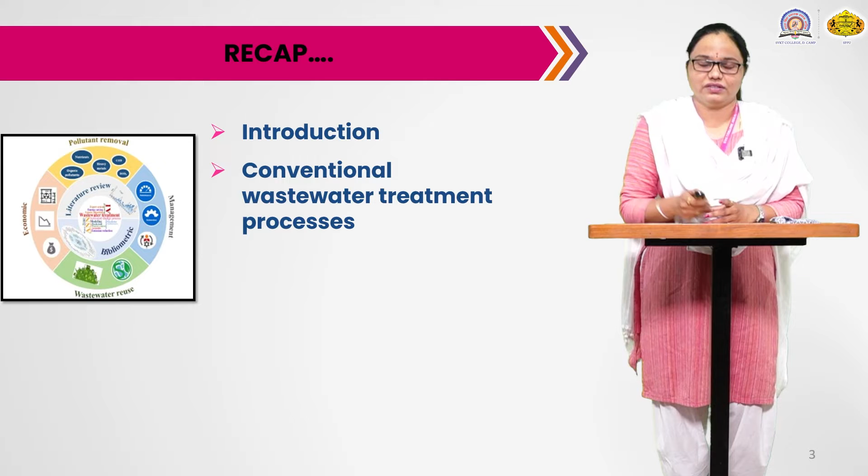In the last lecture, we started with the introductory part of wastewater technology: what is wastewater, how it is used, and what are the types of wastewater treatment. Then we saw the conventional wastewater treatment processes, divided into different stages: preliminary, primary, secondary, tertiary, and then advanced stage. In some cases, advanced treatment is also given to the wastewater.

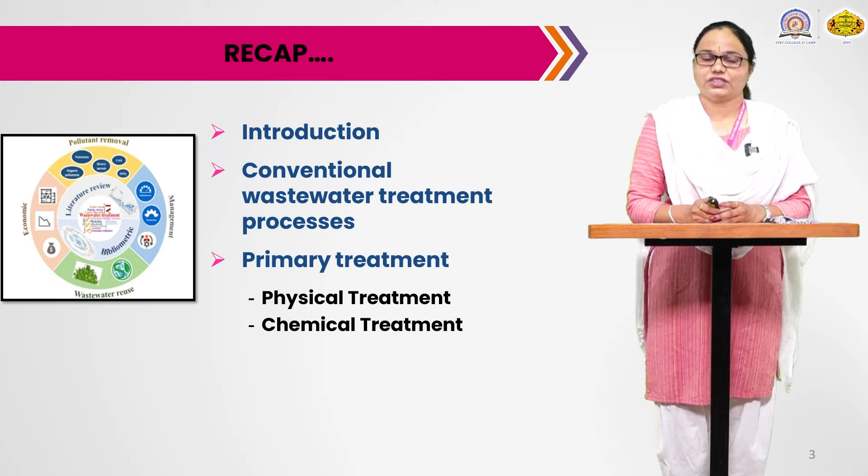In the last lecture, we started with the first step of wastewater treatment, that was primary treatment, in which we saw two methods: physical treatment and chemical treatment. In physical treatment, we generally use screening methods, grit tanks, etc. And for chemical treatment, we use chemicals such as flocculants, coagulants, etc.

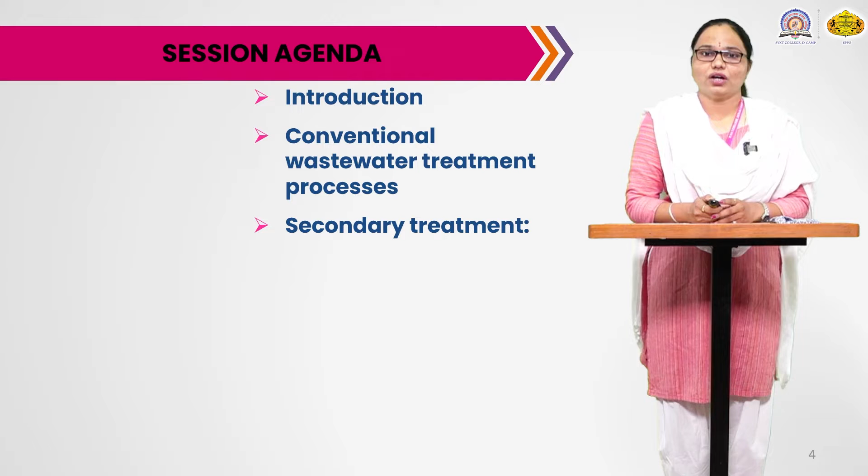Now, today's session agenda is to again start with our introductory part of conventional wastewater treatment process. Then we are going to focus specifically on secondary treatment, in which we are going to study two methods of this secondary treatment, that is activated sludge system and trickling filters.

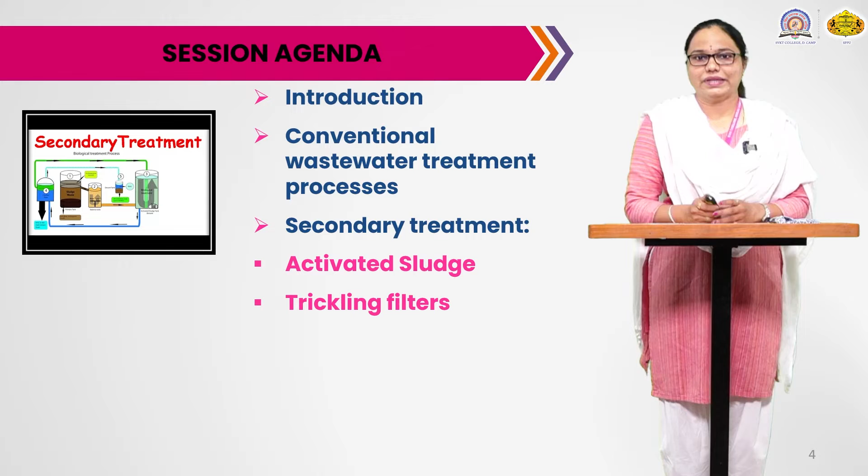So today we are going to see these two methods in detail. Our objectives for today's learning are to give introduction to wastewater technology, then see the secondary sewage treatment methods.

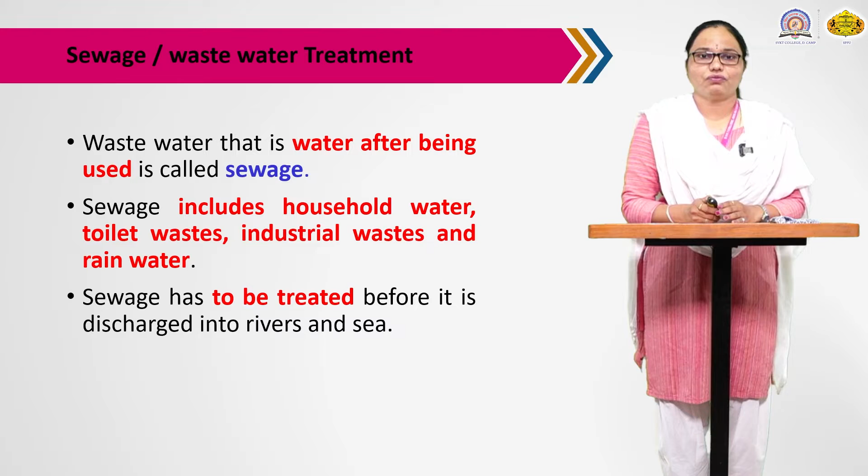This sewage should be treated before it is discharged to the rivers and seas. As we know, there are a number of chemicals and pathogens present in such type of sewage, so prior to discharge into rivers or sea, it should be treated. For such treatment, wastewater plants are developed.

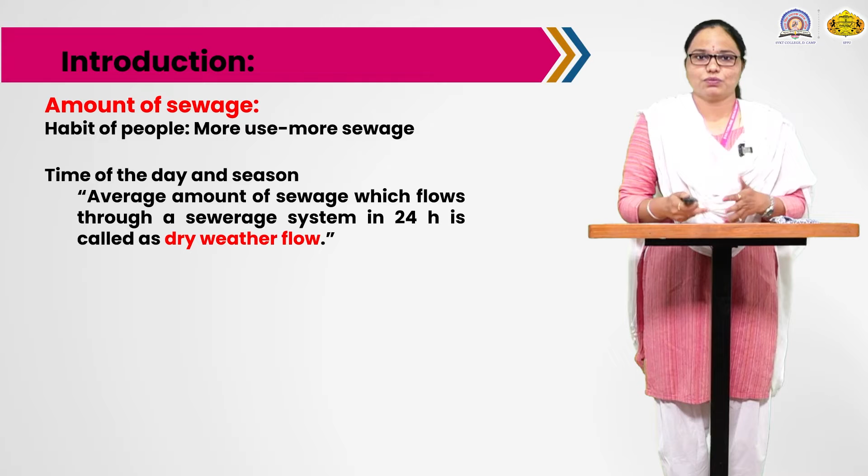Now, amount of sewage produced: it is a habit of people to use more and more water, and as they use more water, a large amount of sewage is generated. Considering time of day and season, the average amount of sewage which flows through a sewerage system in 24 hours is called dry weather flow.

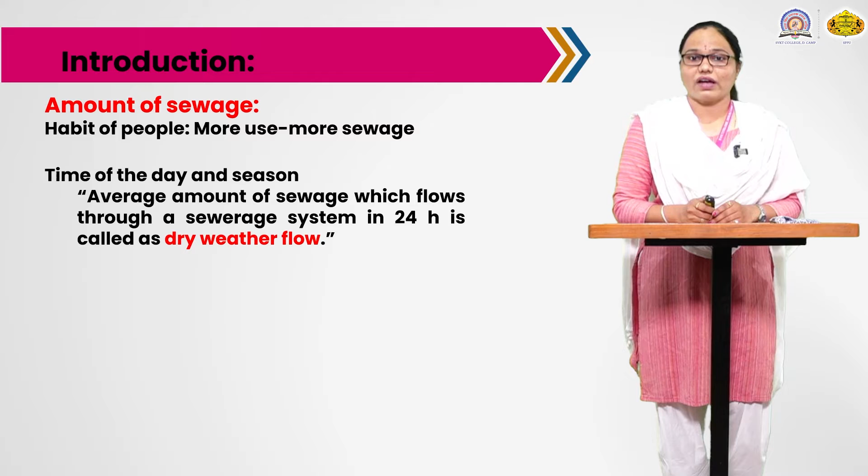Now this sewage may create a number of health issues. First, it creates a nuisance or unsightliness and unpleasant odors. It has a large number of organic matter, which may lead to unpleasant odors. Then this sewage is a source for breeding of flies and mosquitoes, which may lay their eggs in such type of water.

Pollution of soil and water supplies may occur, and contamination of food also occurs due to this sewage. Due to all this, there is an increase in the incidence of disease, especially enteric and helminthic disease. It may lead to diseases such as malaria, dengue, and some food contamination or infections if such type of sewage is not treated.

Now, why is it important to treat sewage? First, wastewater treatment is fundamental to protect the health of many different ecosystems.

Then, properly treated wastewater is a source of water for many purposes; we can reuse this water. Good wastewater treatment allows maximum amount of water to be reused instead of going to waste. These are the important points for wastewater treatment.

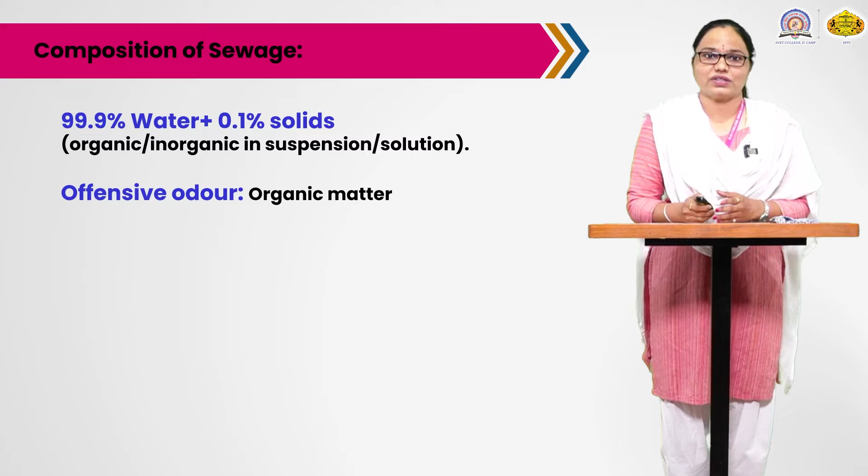The offensive odor of sewage is generally due to the presence of organic matter, which may get decomposed and produce different kinds of byproducts leading to offensive odor. This sewage also has a large number of pathogenic organisms; as we know, 1 gram of feces may contain 1000 millions of E.

...coli, 10 to 100 millions of fecal streptococci, and 1 to 10 millions of spores of Clostridium perfringens. Humans generally secrete 100 grams of feces per day, so you can calculate how much pathogenic organisms are present in the sewage. So such sewage must be treated, or it may be disinfected too, as these organisms can be killed.

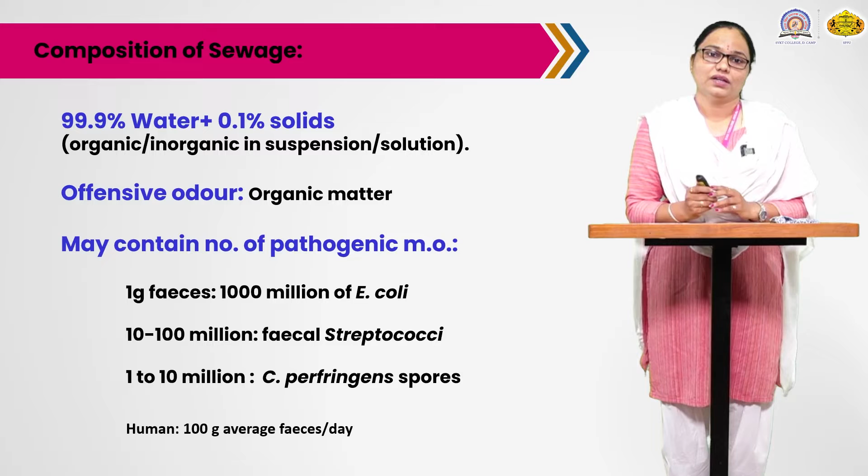Decomposition of organic matter in the sewage takes place generally by two ways. The first and most efficient method is aerobic treatment. It requires continuous supply of oxygen, so all the organisms can grow in that sewage. Here bacteria, fungi and protozoa convert organic matter into CO2, H2O, ammonia, nitrates and sulfates.

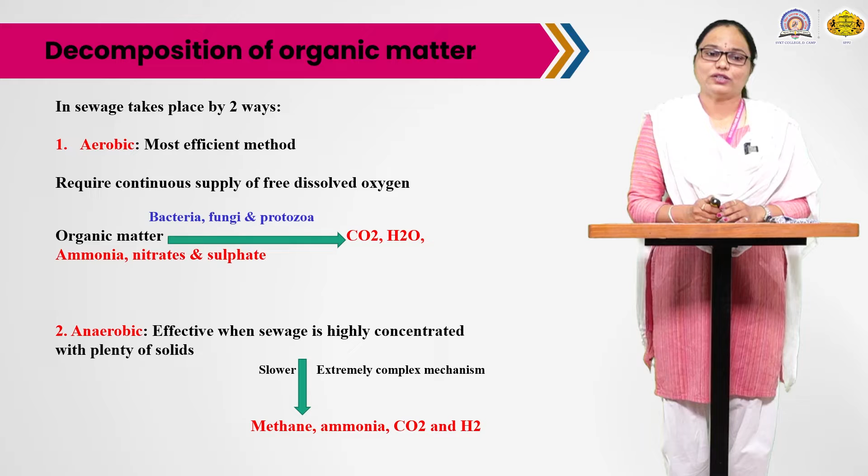The second method is anaerobic method. It is effective when sewage is highly concentrated with plenty of solids. Compared to the aerobic decomposition method, this method is slower and has an extremely complex mechanism, and it leads to conversion of solids into methane, ammonia, CO2 and H2. So in this way the organic matter is decomposed by two methods, aerobic and anaerobic.

Now, benefits of wastewater treatment. What happens after wastewater treatment? What are the benefits? There are different benefits: reduction of waste, energy production, reuse of water, pollution control, fertilizer production and many more. So these are the benefits of wastewater treatment.

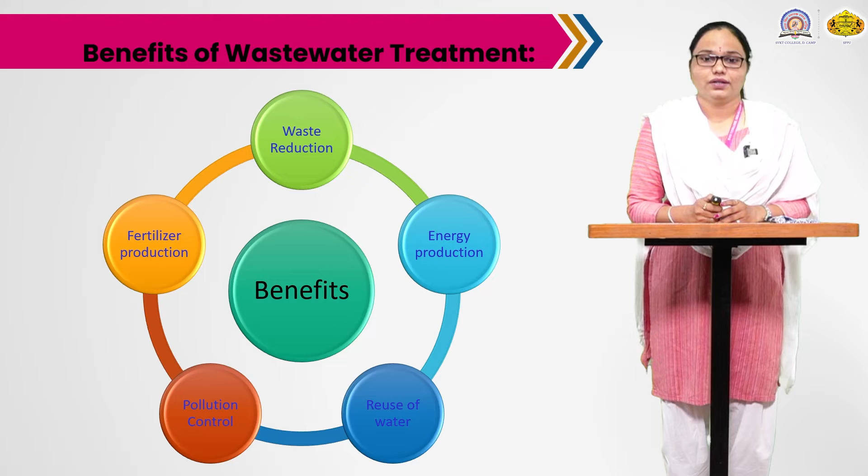Now the conventional wastewater treatment process is divided into different stages. The incoming sewage is treated in different stages. The first is preliminary treatment, where screening is done and grit chambers are used. Then is primary treatment, where both physical and chemical methods are used, but generally this primary treatment is a physical method of treatment.

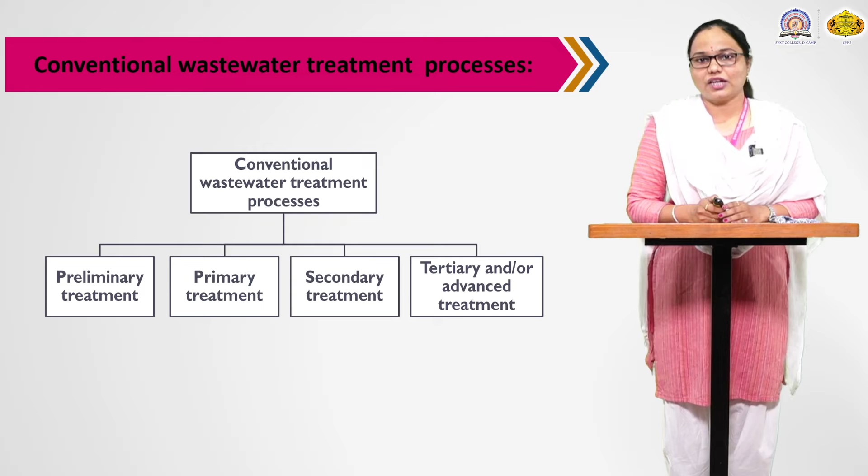Then the water comes to the secondary treatment process, which is generally biological, where there is a role of organisms which decompose the organic matter. After that, it goes to the tertiary or advanced treatment, which is mostly chemical, where different chemicals are used for the disinfection process. Sometimes UV rays are also used for disinfection. So this conventional wastewater treatment is divided into different stages.

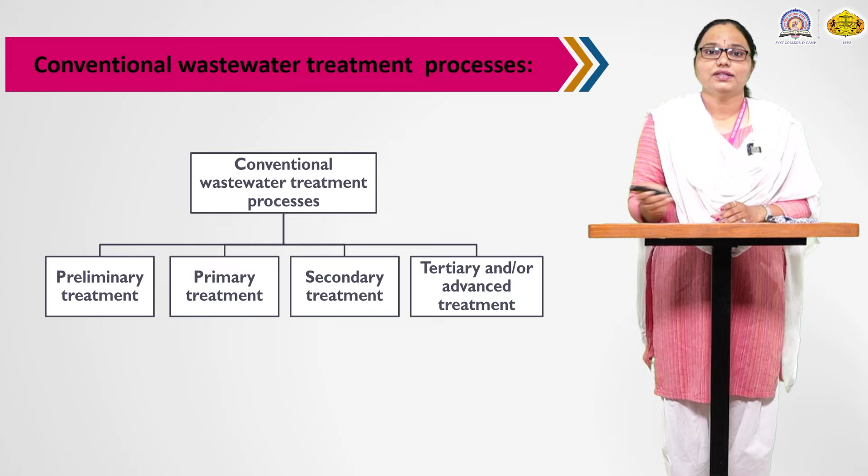Levels or steps of wastewater treatment: as I told you, the first stage is primary treatment. It is generally a physical process. The floating material and solid material present is removed in this stage. Secondary is secondary treatment, which is a biological process, where there is a role of organisms. The organic matter is decomposed by this bacteria into CO2 and water. So in this step, most of the BOD is reduced.

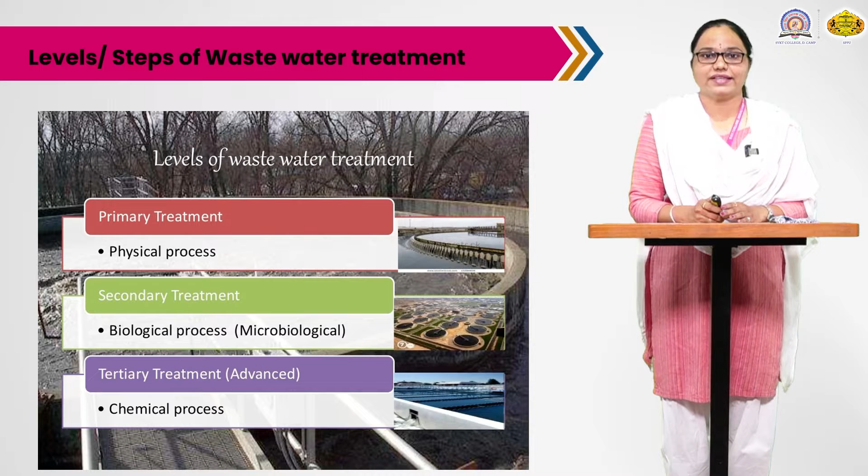Then is the tertiary treatment, which is an advanced method or stage, where generally chemicals are used to kill the pathogens present in the wastewater. So in this way, the wastewater treatment plant has these stages: primary treatment, secondary treatment and tertiary treatment.

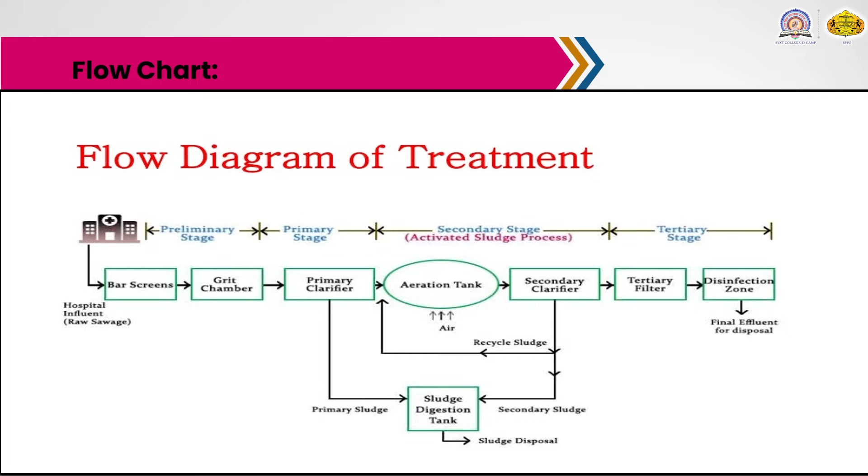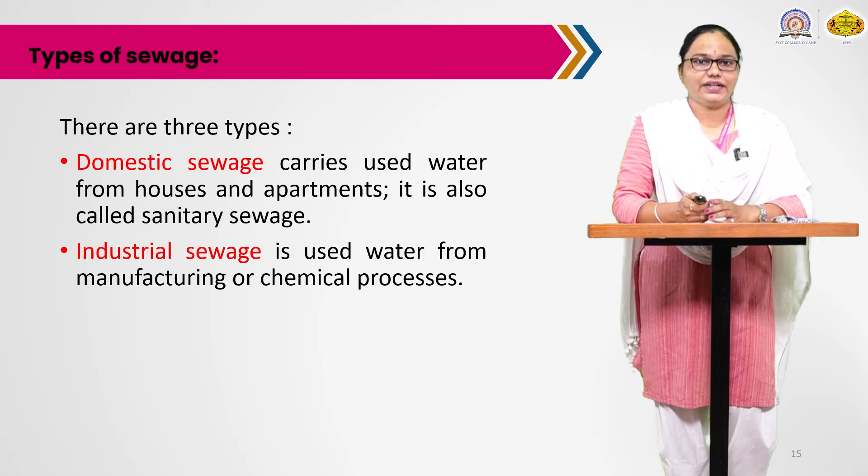Today we are going to focus on the secondary stage, types of sewage. There are different types of sewage, mainly three types. Domestic sewage carries used water from houses and apartments; it is also called sanitary sewage. Second is industrial sewage, which is used water from manufacturing or chemical processes, generally industrial effluent. Third is storm sewage or storm water, which is runoff from precipitation collected in a system of pipes or open channels. So sewage may be domestic, industrial or storm sewage.

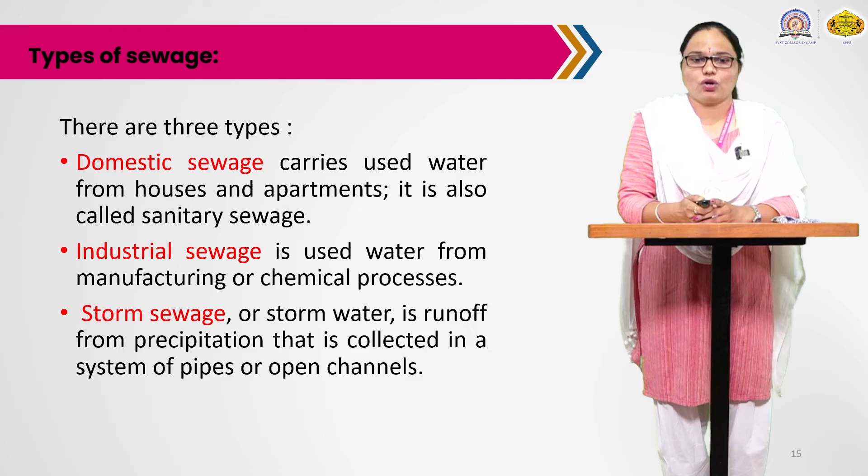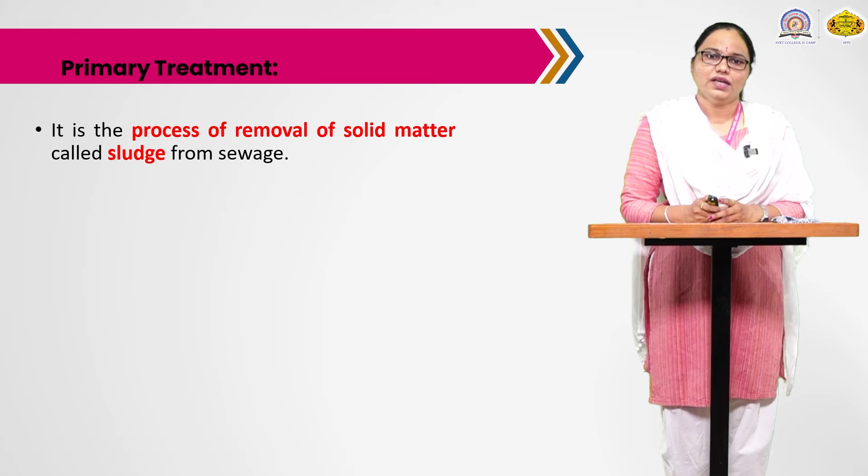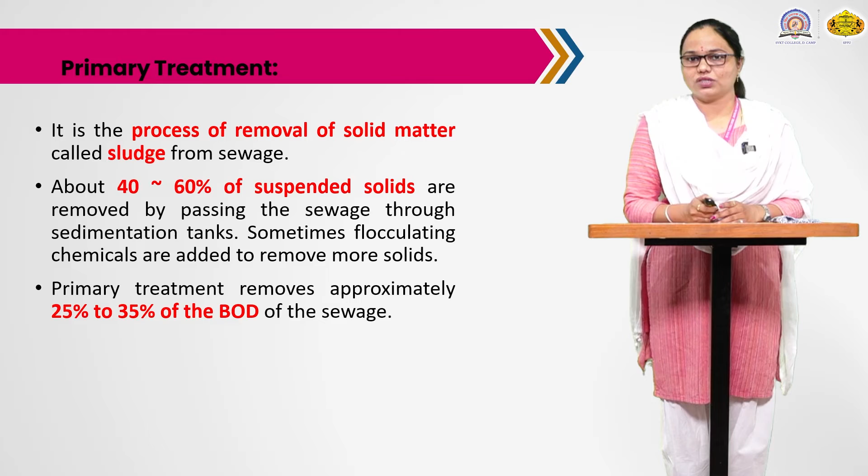Now primary treatment, which we have seen in the last lecture, is a process of removal of solid matter called sludge from the sewage. About 40 to 60% of the suspended solids are removed by passing this sewage through sedimentation tanks. Sometimes to increase the speed, we use some chemicals or flocculating chemicals to remove the solid material which is lighter in weight. This method generally removes approximately 25% to 35% of the BOD of the sewage.

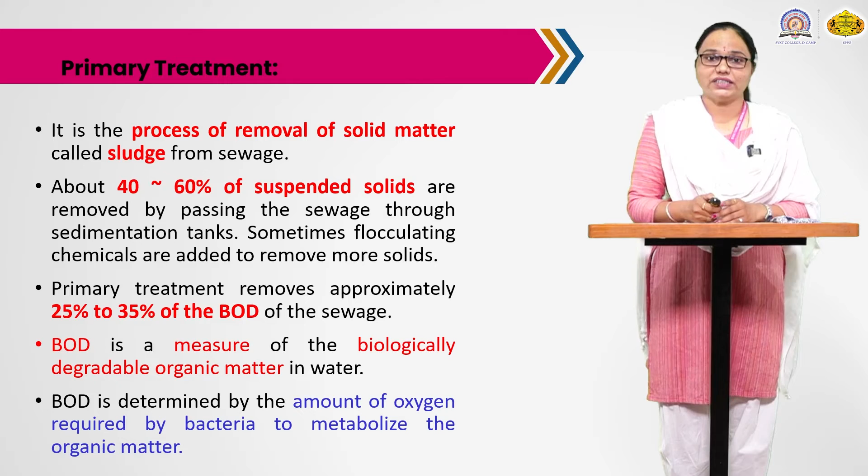Now BOD is a measure of biologically degradable organic matter in water, which we have seen in the last lectures. BOD is determined by the amount of oxygen consumed by bacteria to metabolize the organic matter, and that is called biological oxygen demand.

Secondary treatment, as I told you, is the biological degradation of organic matter in sewage after the primary treatment. In this process sewage is aerated vigorously to encourage the growth of aerobic bacteria and organisms that will oxidize the dissolved organic matter to CO2 and water. This extra step, aeration, is given in an aeration tank to provide lots of oxygen for the growth of aerobic bacteria. Two commonly used methods for secondary treatment are activated sludge and trickling filters.

Now we are going to see what the activated sludge system is. It is a type of wastewater treatment process for treating sewage or industrial wastewater using aeration and a biological floc composed of bacteria and protozoa. So it has basically two steps: first is aeration and the second is activated sludge.

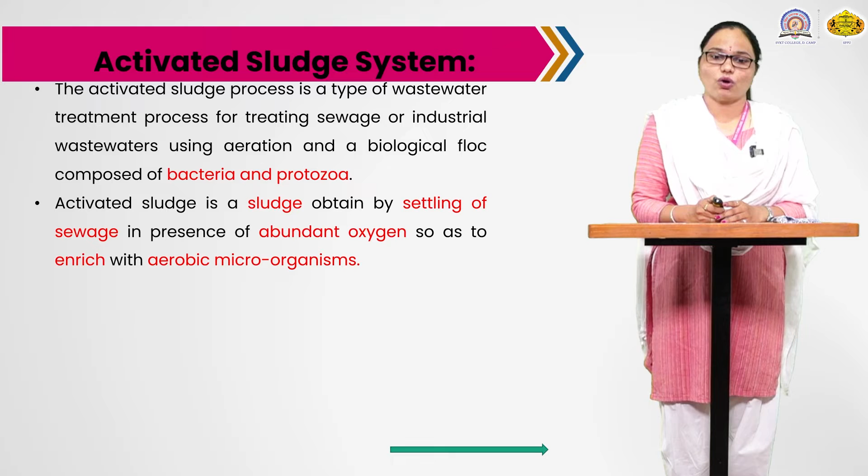So what is activated sludge? It is a sludge obtained by settling of sewage in the presence of abundant oxygen so as to enrich it with aerobic microorganisms. This activated sludge in sewage, in presence of oxygen, results in oxidation of organic matter present in that sewage, and coagulation and flocculation of suspended and colloidal matter.

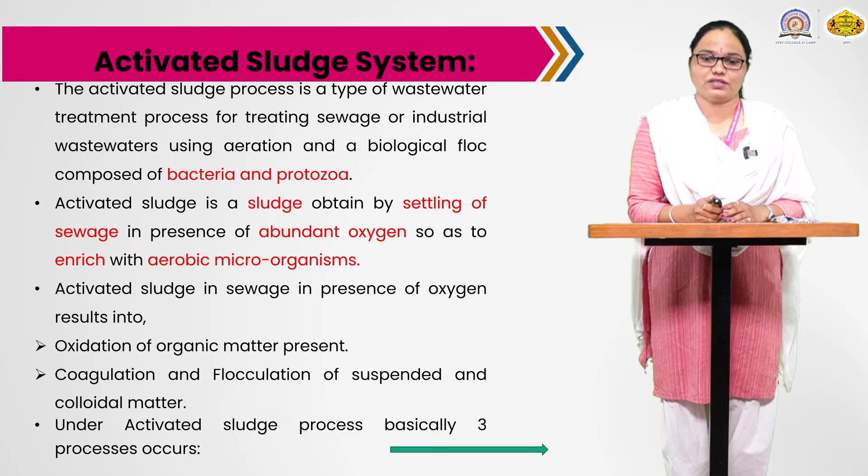Under this activated sludge process, basically 3 steps or processes occur. First is oxidation, where the organism oxidizes organic matter present in the sewage into carbon dioxide, water and energy. The organic matter, in presence of oxygen and bacteria, is converted into CO2, water and ammonia plus energy, and other end products are generated.

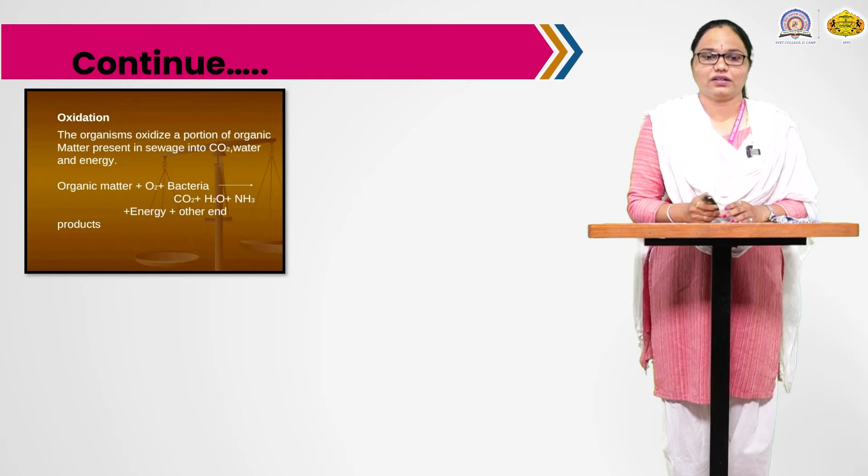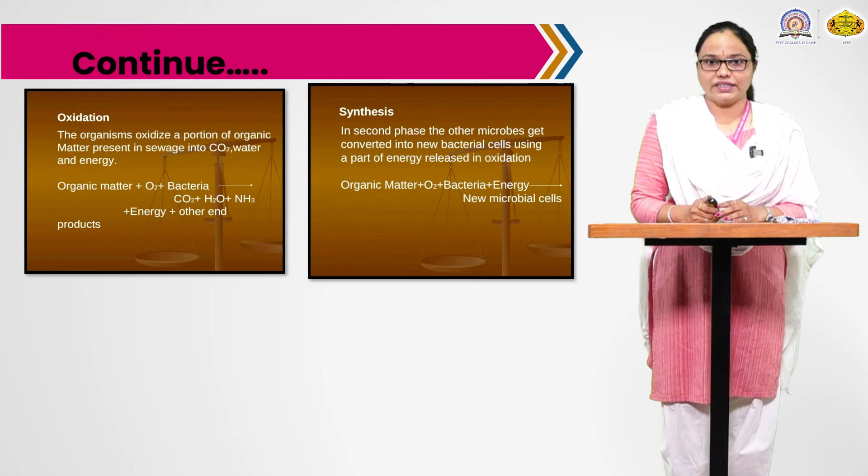The second step is synthesis. In this phase, microbes are converted into new bacterial cells using part of the energy released in oxidation. Here organic matter, in presence of oxygen, bacteria and energy, is converted into new microbial cells. The third step is endogenous respiration.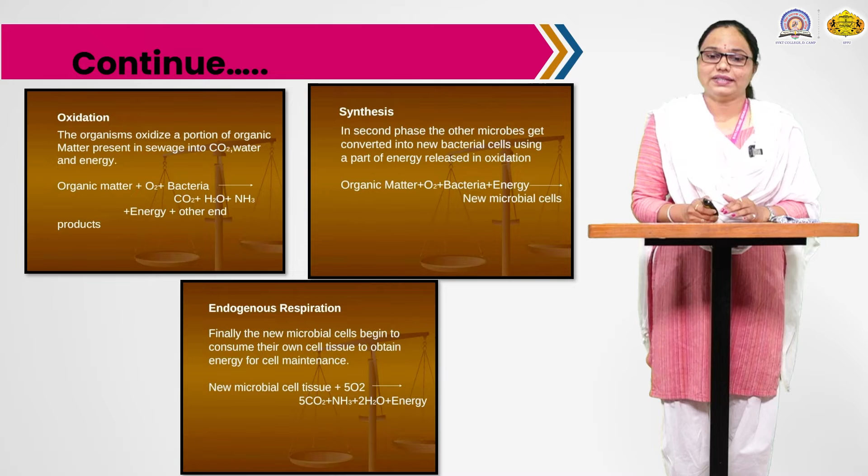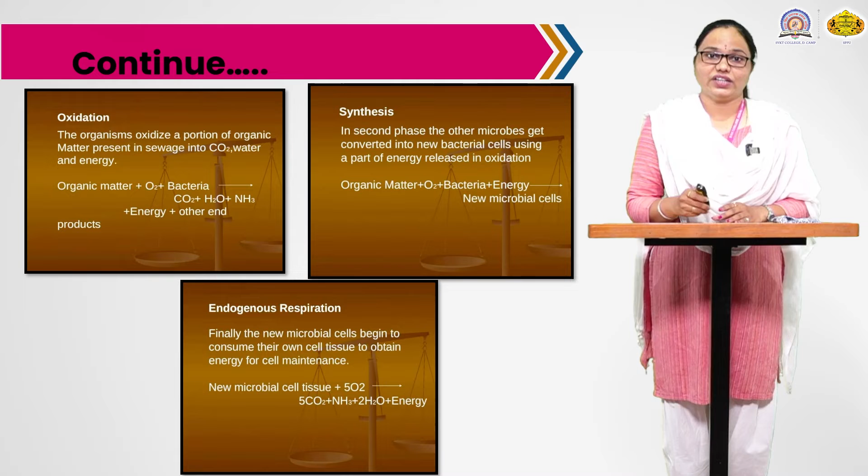Finally, the new microbial cells begin to consume their own cell tissues to obtain energy for cell maintenance. Here new organisms or microbial cell tissues, in presence of oxygen, convert the organic matter into carbon dioxide, ammonia, water and energy at higher speed. So basically these 3 steps occur in the activated sludge process.

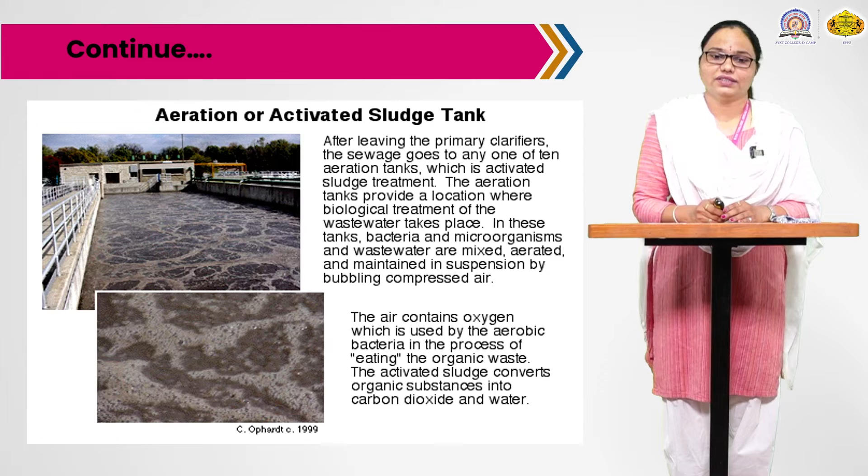Now this is some image of the aeration or activated sludge tank. You can see the air contains oxygen which is used by aerobic bacteria in the process of eating or degradation of organic waste. The activated sludge converts organic substances into carbon dioxide and water. These are some actual images of the activated sludge tank at the site.

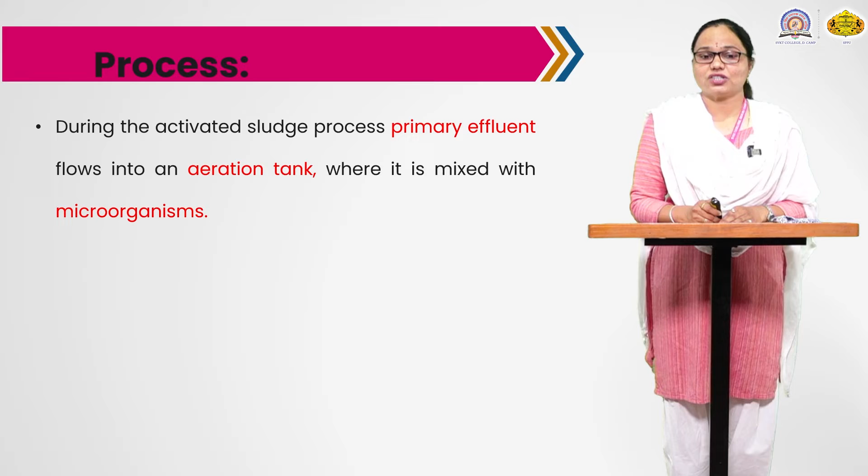Now let's see how the process occurs. During the activated sludge process, the primary effluent first flows towards the aeration tank, where it is mixed with microorganisms. The aeration tank injects a steady supply of oxygen from the bottom into the wastewater, ensuring adequate oxygen supply so the organisms can use that oxygen to break down the organic matter present in the effluent.

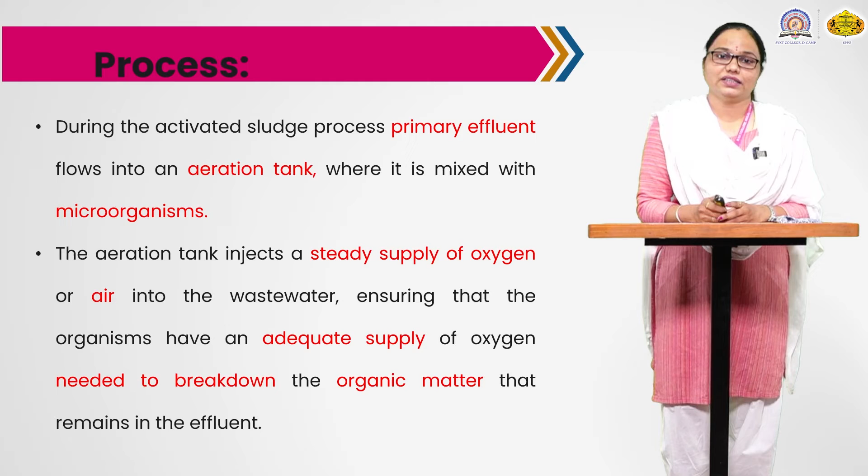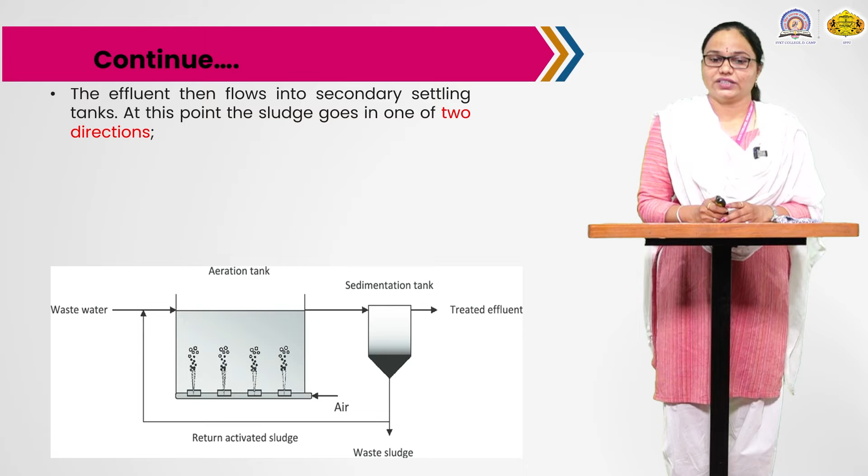Now the effluent flows to the secondary settling tank. At this point the sludge goes in one of two directions. In the diagram you can see it first goes back to the aeration tank. This is because the return of the sludge contains a large amount of active organisms that will rapidly break down the organic matter. You can see how the aeration process is applied here.

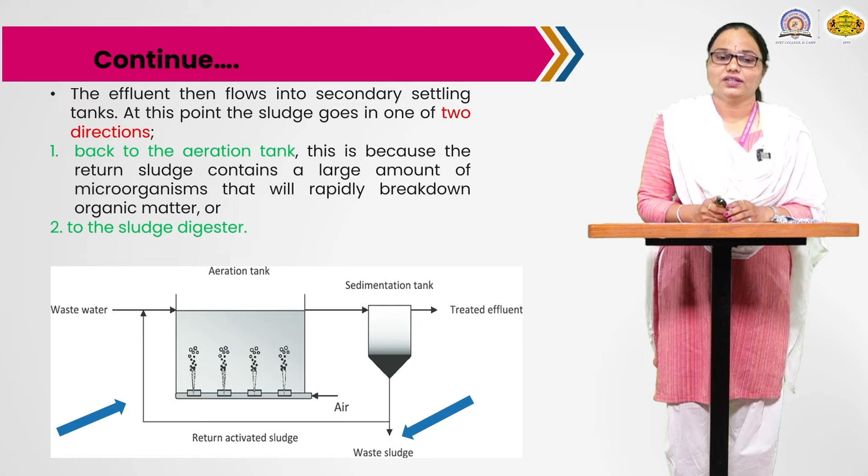Part of the activated sludge is returned to the aeration tank, and the second part goes towards the sludge digester. The extra sludge is collected into the waste sludge container.

The treated water will enter the tertiary treatment stage. Here it will go through the final treatment stage before it is released into a natural water system.

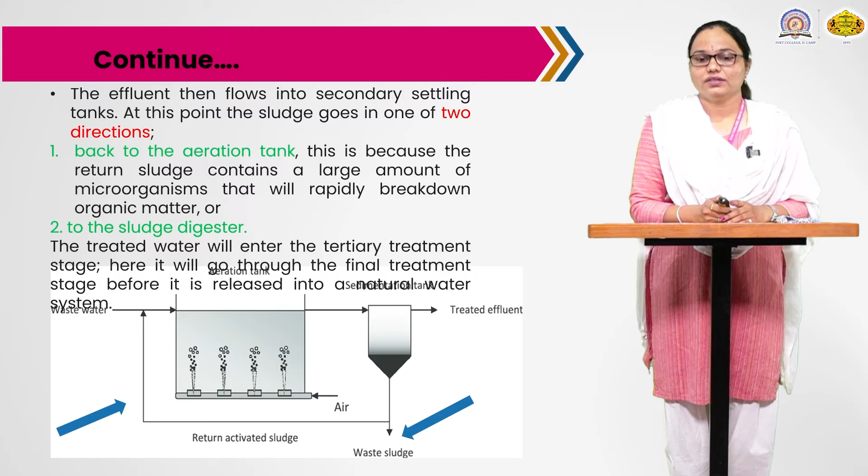Now this is the flow chart of the activated sludge process. From the preliminary treatment, this sewage goes towards the primary clarifier and then it enters the aeration tank, where aeration is given.

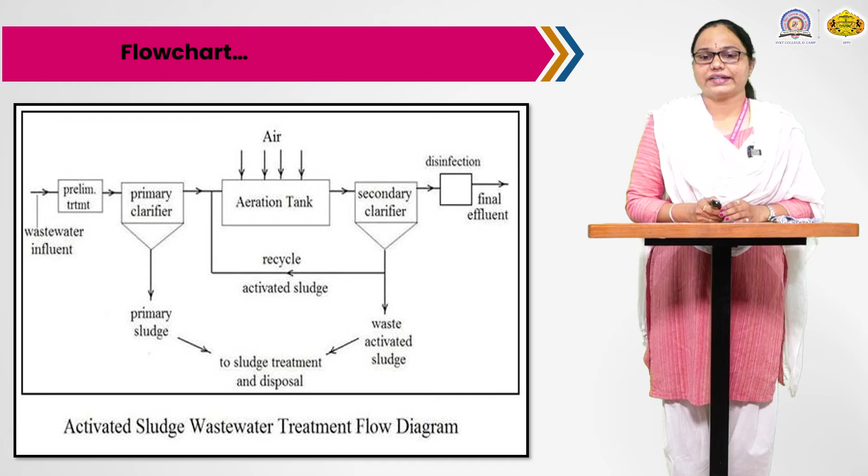The sludge from the secondary clarifier is recycled and called activated sludge, which contains active organisms. The extra sludge is collected into the sludge treatment and sludge digester, and afterwards it is treated and disposed. The sewage from the secondary clarifier then enters the tertiary treatment where disinfection occurs.

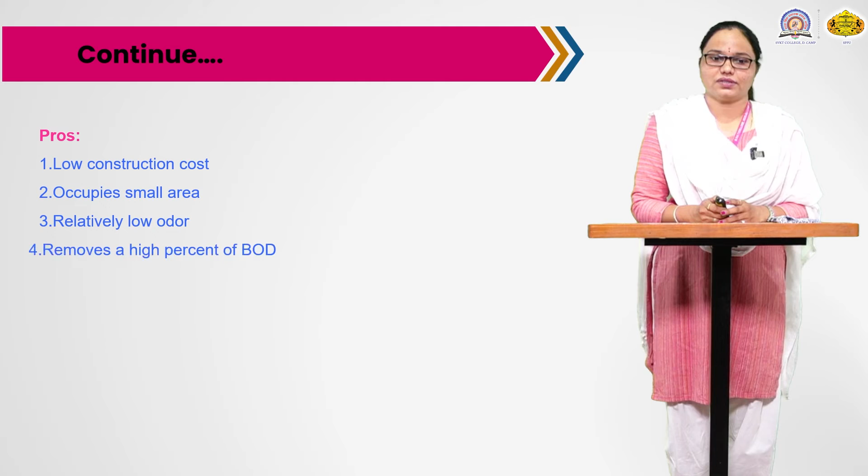Now there are some pros and cons of this method. The first is low construction cost. It occupies a small area, meaning relatively low odor is produced, and it removes a high percent of BOD.

Cons are high operating cost because extra aeration pumps are needed, and high energy expenses for oxygen demand.

Now we will move towards trickling filters, the second method. What are trickling filters, also called biofilters? It consists of a basin or tower filled with support media such as stones, plastic shapes, or wooden slats.

In this tower with support media, wastewater is applied intermittently or sometimes continuously over the media. The organisms present in the effluent get attached to the media, supported by stones, plastic shapes, or wooden slats. They attach to such media and form a biological layer or fixed film, also called a biofilm, on the surface of that media.

The effluent, which has a large amount of organic matter, diffuses into the film where it is metabolized by the organisms present in that biofilm. Oxygen is normally supplied to the film by natural flow of air, either up or down through the media, since aerobic organisms are present there, depending on the relative temperature of the wastewater and the ambient air.

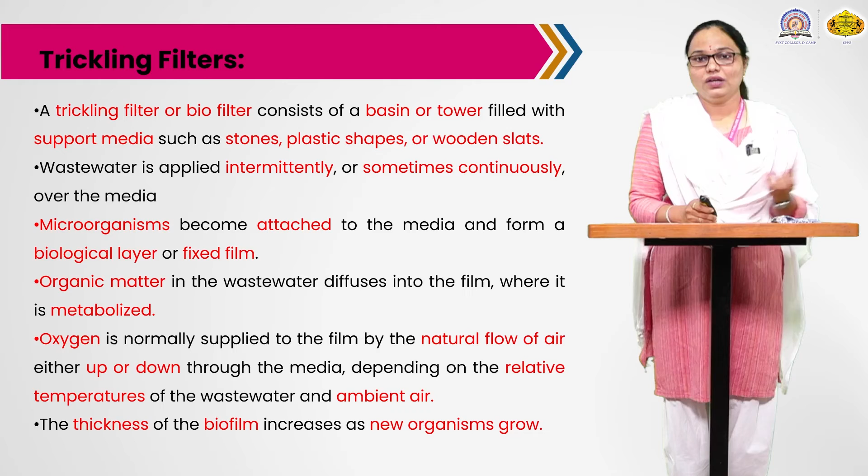The thickness of the biofilm increases as new organisms grow. As the incoming effluent arrives, a large amount of organisms come into the trickling filter, so the biofilm becomes thickened due to growth of new organisms.

Periodically a portion of the biofilm sloughs off the media. This material is separated from the liquid in a secondary clarifier and discharged to a sludge processing unit. The clarified liquid from the secondary clarifier is called secondary effluent, and a portion is often recycled to the biofilter to improve the hydraulic distribution of wastewater over the filters.

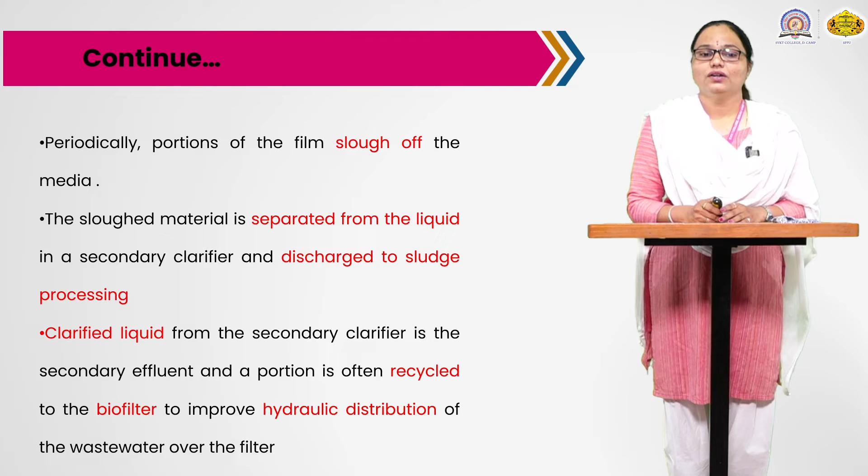There is a formation of a slime layer or biofilm on the surface of this media. The incoming effluent has a number of organisms which get attached to the surface of this media and form the slime layer. The organic matter present in the effluent is consumed by that bacteria, and the extra thickened layer sloughs off from that support. Oxygen is supplied through natural air.

Now the organic material present in the wastewater, in the presence of air, is degraded or decomposed by the organisms present in the slime layer, and that organic matter is converted into CO2 and other oxidized products.

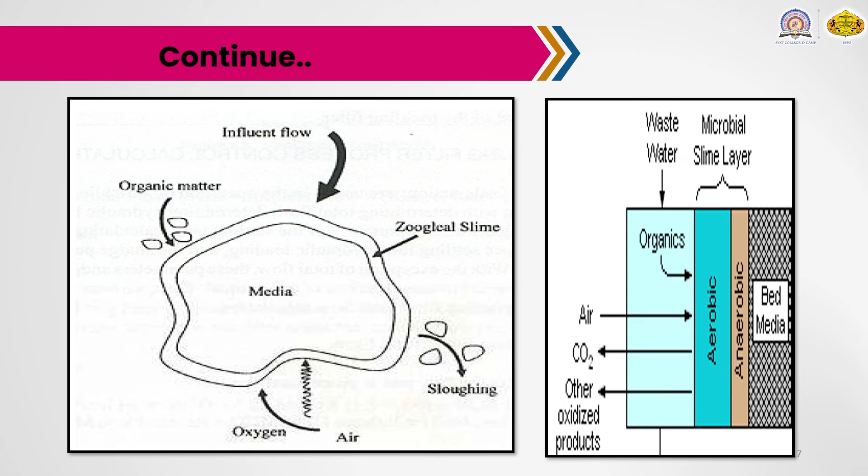So in this way the slime layer is present, and the effluent or the organic matter is degraded.

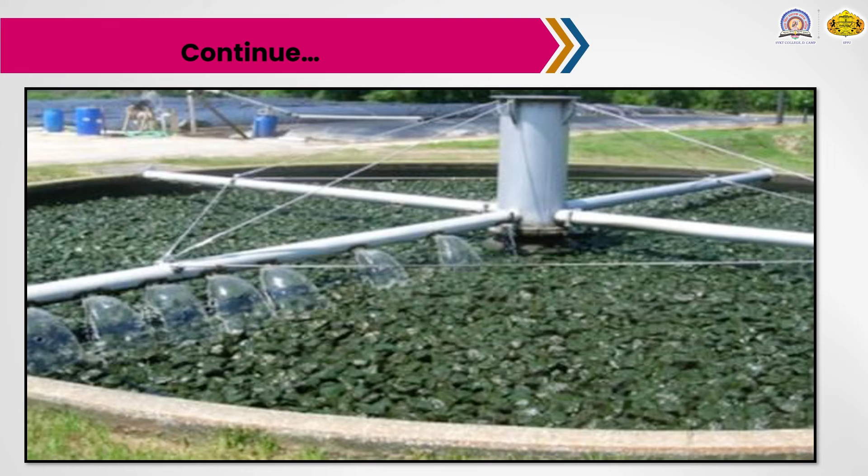These are the trickling filters. Now we are going to see the main parts or components of the trickling filters. It has a rotating arm, as we have seen in the image, that sprays wastewater over the filter media by spray nozzles. Different kinds of nozzles are present through which this wastewater is sprayed.

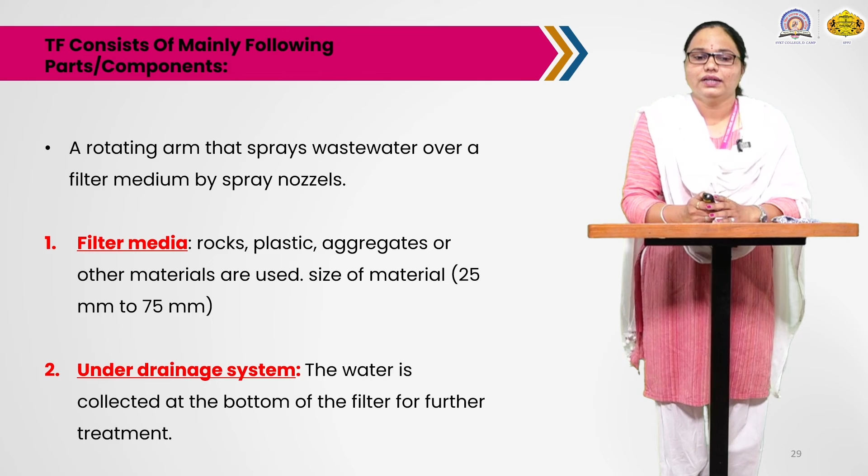It has filter media which is made up of rocks, plastic, aggregates or other materials. Generally the size of the material is 25 mm to 75 mm. It has an under drainage system. The treated effluent is collected at the bottom of the filter for further treatment.

It has filter walls which are made honeycomb to circulate the air. Sometimes a ventilation duct is also provided. Depth of the media is 1.8 to 2.4 meters. Honeycomb structure wall is provided for circulation of the air.

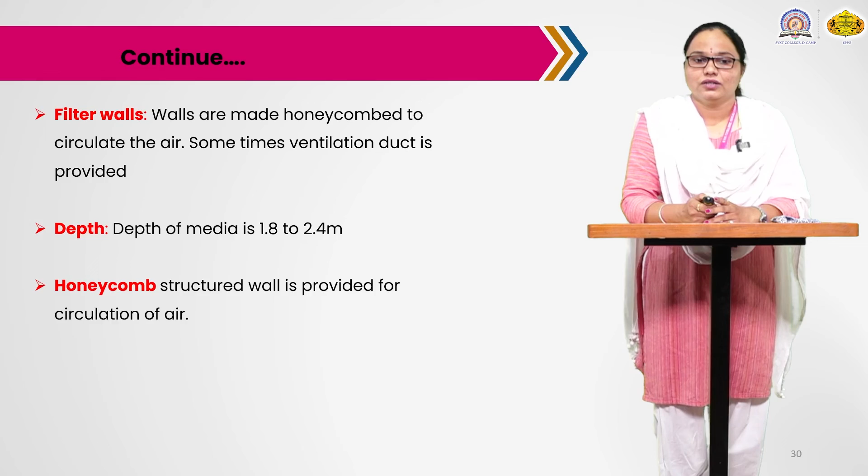Now this is a trickling filter. There is a center well. There are rotating arms, a distributor arm which rotates. They have different kinds of nozzles through which the wastewater is sprayed on the filter media. At the bottom you can see there is an outlet box, or outlet channel, which is underground.

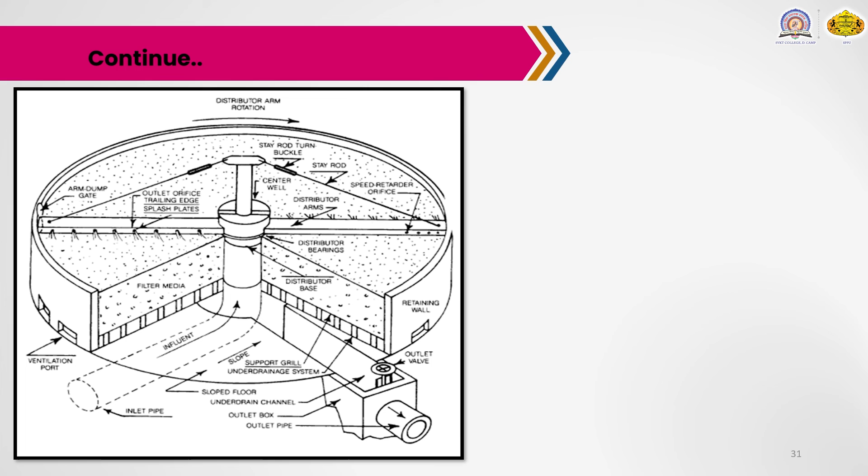In this image you can see there is a filter bed. The feed pipe is there through which the effluent is sprayed with the help of sprinklers, which continuously rotate. Filter support is there, and at the bottom collection of the effluent takes place. After degradation or decomposition of the organic matter from the effluent, it is collected at the basement. Air is continuously passed, and the effluent collecting channel is also present at the bottom of this unit.

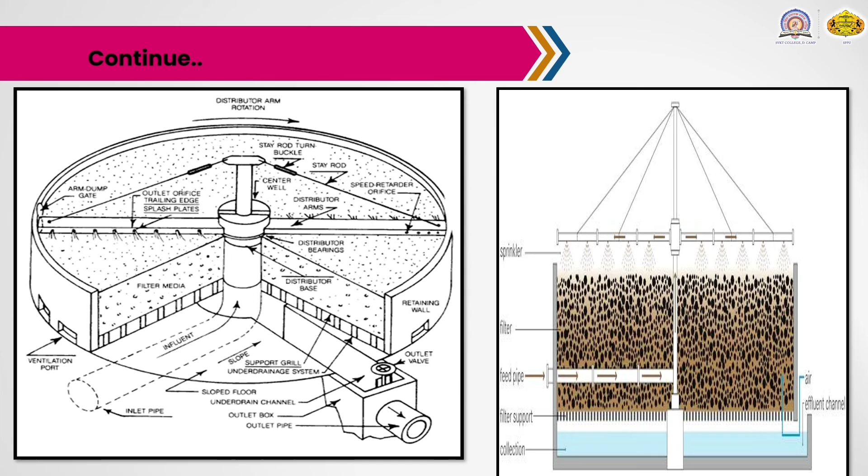Treatment efficiency: a well operated low rate trickling filter in combination with a secondary settling tank may remove about 75 to 90% BOD, but it produces highly nitrified effluent. It is suitable for treatment of low to medium strength domestic wastewaters.

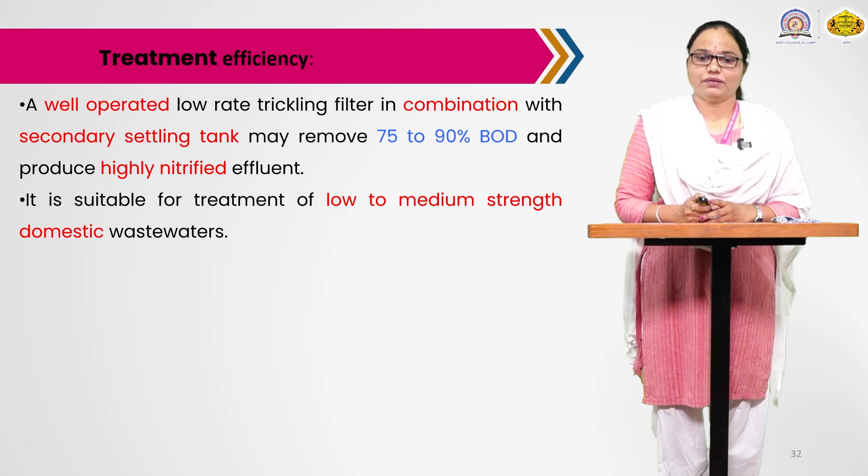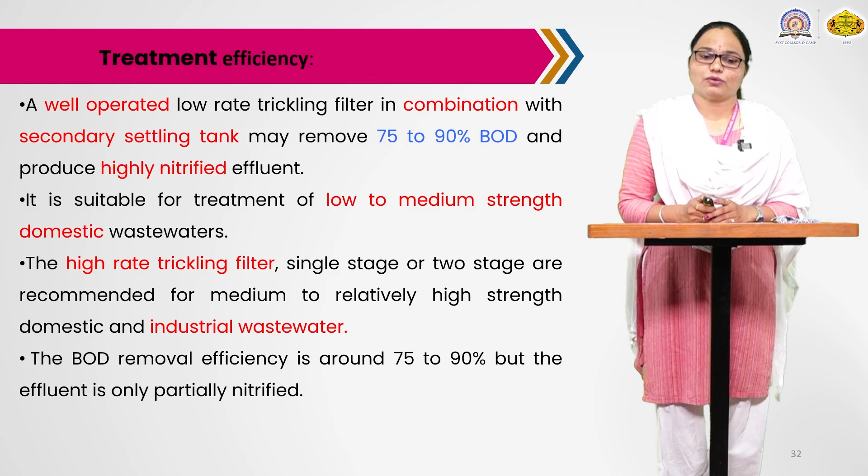The high rate trickling filters may be single stage or two stage. They are recommended for medium to relatively high strength domestic and industrial wastewater. The BOD removal efficiency is about 75 to 90%, but the effluent is only partially nitrified.

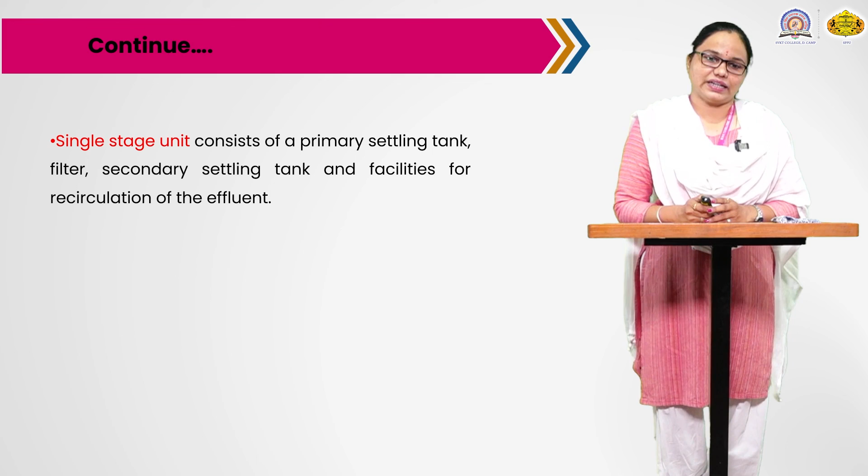A single stage unit consists of a primary settling tank, filter, secondary settling tank, and facilities for recirculation of the effluent. Two stage filters consist of two filters in series with a primary settling tank and intermediate settling tank, which may be omitted in certain cases, and a final settling tank. So in this way, this trickling filter can be arranged in different stages depending upon the type of effluent present.

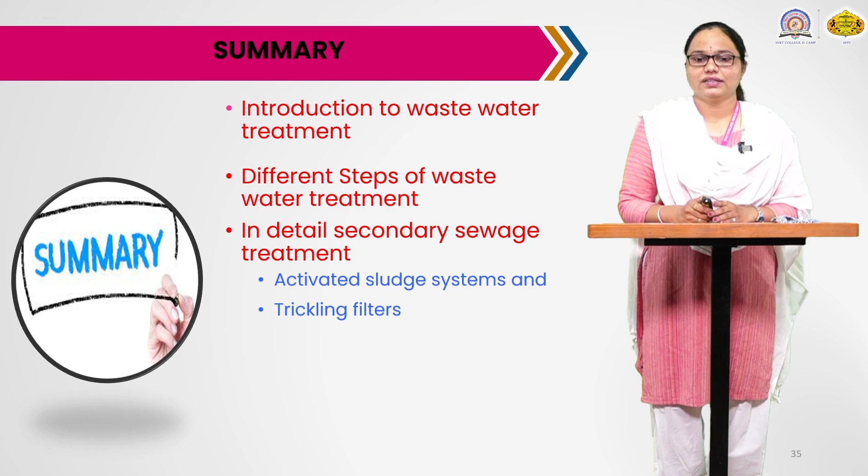Now if we summarize today's lecture, we started with an introduction to wastewater treatment: what is sewage, its composition, how much sewage is secreted, that it contains pathogenic organisms, different kinds of organic matter, etc. We covered different steps of water treatment - primary, secondary and tertiary. In this lecture we concentrated on secondary sewage treatment by taking two examples, the activated sludge system and trickling filters.